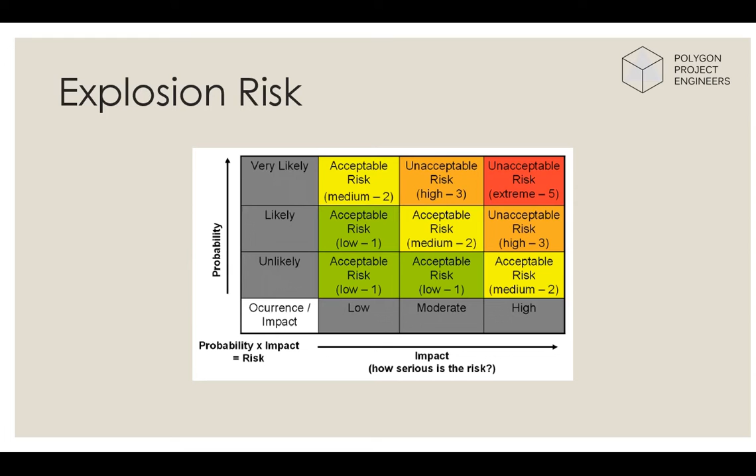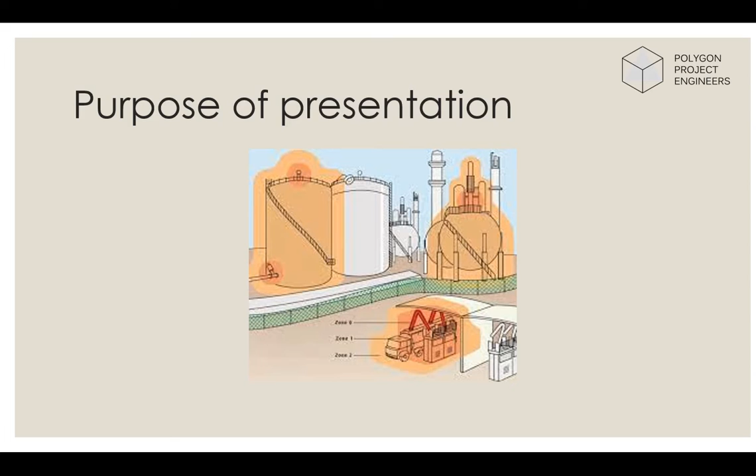This presentation seeks to arm those who dare venture into the subjective matter of hazardous location classification with the knowledge required to make decisions regarding the dark art of zonal classification in all its vague and unconcise glory. The information in this presentation is set out in a step-by-step format to allow easy navigation of its contents and provides an instructive checklist on the method of allocating hazardous zones. Please keep in mind that the contents of this presentation is applicable to flammable dust and vapor only.

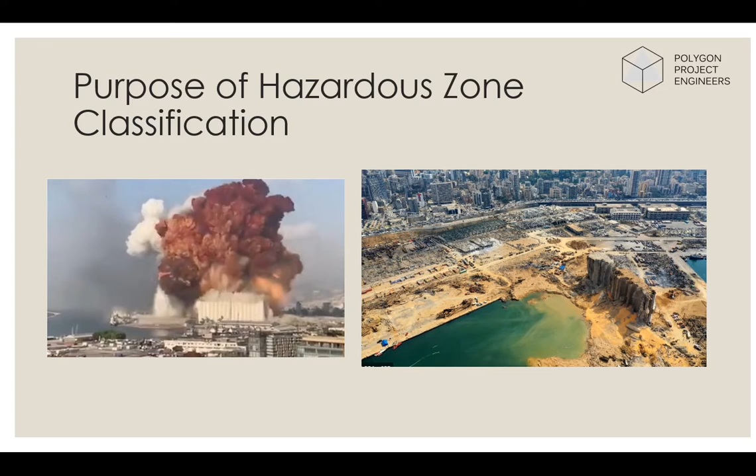The risk of explosion and fire damage is a severe one. Defining conditions which tend to cause the presence of an explosive atmosphere allows for the selection of safe apparatus within the defined areas. The classification of these zones is necessary to understand the areas that are most likely to cause an explosion or fire hazard due to the frequency of an explosive gas or dust atmosphere. The hazardous zone will also inform the apparatus that can be used within them. The existence of an explosive atmosphere can be attributed to the presence of suspended combustible dust or combustible vapors.

The primary specifications concerning the aforementioned topics are the BS EN IEC and SANS 60079-10-1 and 10-2 and their derivative SANS 10108. It's clear to see that the fear of simplification of the standard, given its subjectivity, hinders international communities from assimilating the standard, and they choose to adopt it instead. The adoption of the former two standards is a testament to the inability of the SANS 10108 to perfectly or even adequately portray the requirements of hazardous zoning.

Intrigue and ambiguity in standards are generally seen as the weapons of the engineer. However, the so-called loopholes in this particular South African standard feel more like bullet holes, and the engineer is forced to fill in these information gaps with international standards, analogical reasoning, and critical thinking.

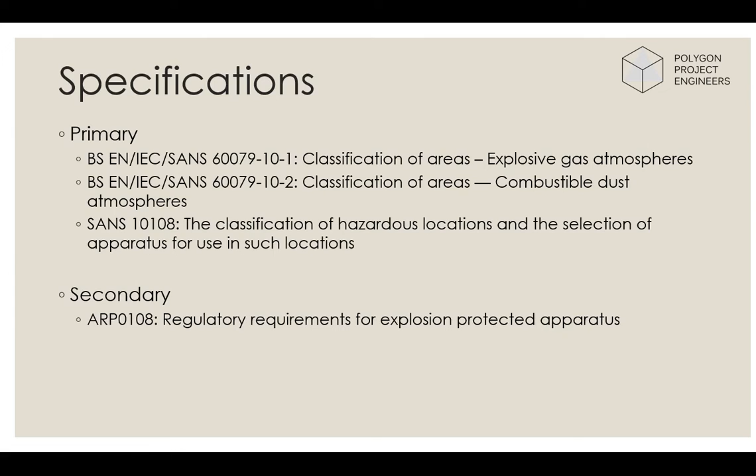The first step in the process of determining hazardous classification zones is to determine the relevant materials handled on site. Materials are grouped into two main subcategories, that is, flammable liquids that give rise to flammable vapors and flammable solids that give rise to flammable dust. Flammable vapors and dust are the only two substances that can give rise to an explosive atmosphere.

Flammable liquids are classified by group and flammable dusts are classified by class. The class definitions are defined in the SANS 10108 explicitly, but the groups are not clearly defined and are based on other standards. The groups do, however, play a role in apparatus selection. It is critical to note that the classification in terms of hazardous zoning is separate from the classification based on closed cup flashpoint that we are familiar with. Classification of specific materials is found in SANS 10108.

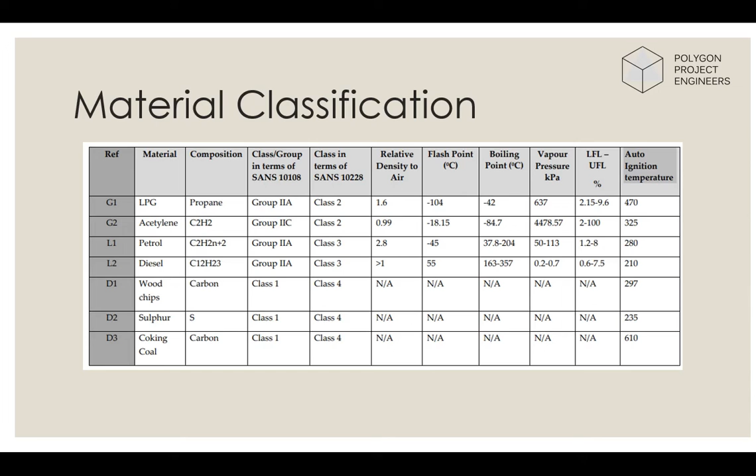Useful reference information for the classification of flammable vapors may be composition, flashpoint, boiling point, vapor pressure, upper and lower flammable limit, and auto-ignition temperature. An important factor to consider is relative density to air to determine rise or sink. Note that the density of vapor is different from the density of the liquid.

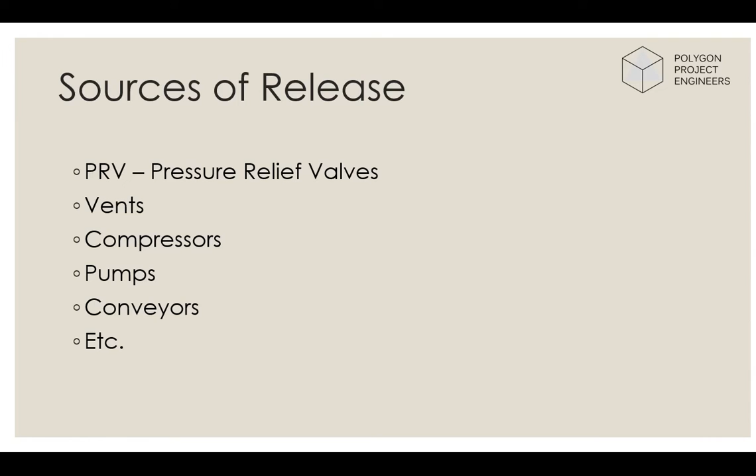Sources of release of flammable materials and substances which could lead to an explosive atmosphere should be established. These sources of release could be continuous, primary, or secondary, and are usually indicative of the zone. However, the subjective definition of each zone as shown in the next slide should be the sole manner in which zones should be classified. The rate of release and forms of release is also critical to understanding the limits of the hazardous zone. Extensive information on sources of release and their implications can be found in the international standards.

The application of hazardous zoning is only as good as its definitions. Given the subjective nature of the topic, the zones are defined as Zone 0, Zone 1, Zone 2, Zone 20, 21, and 22. The first three zones are for explosive gas atmosphere, and the last three zones are for dust atmospheres. It's dependent on frequency and for the length of period that it can create an explosive atmosphere.

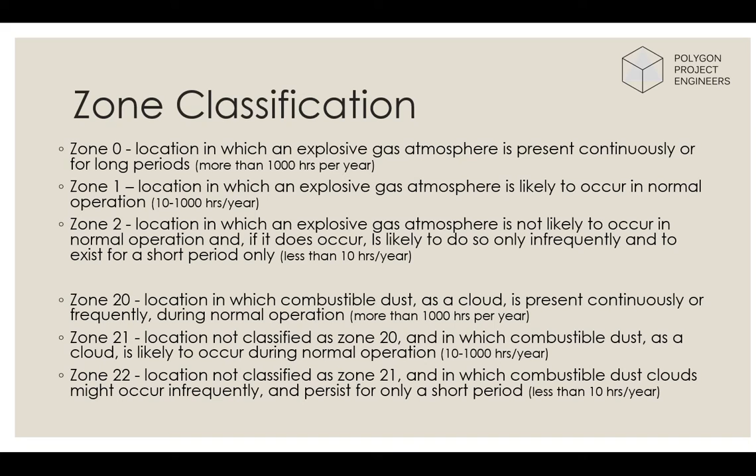The cowardice of the authors of the SANS 10108 standard is evident from their fear of clearly stating geometries, limits, and distances, or even providing a method of determining these distances. The SANS 10108 uses the international standards as a crutch in this regard to prevent the explicit demarcation of hazardous zones. The international standards provide an excellent resource on the suggested geometries of flammable vapors under varying conditions. The zone geometries of dust areas are specific to conditions, applications, and processes.

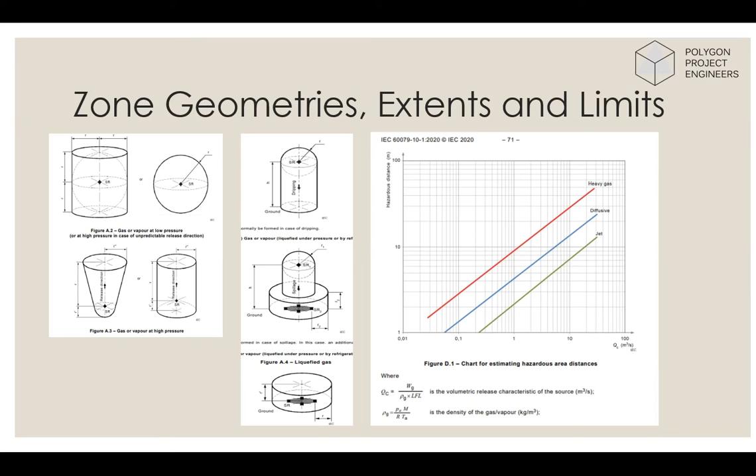The intended method of determining the extent of hazardous zones is to first identify the volumetric release rate of the potential leak and using a graph to determine the hazardous distance depending on the characteristic release. The release could be heavy gas, which is heavier than air and falls down, diffusive, which is lighter than air and floats up, or jet, which is forced expulsion.

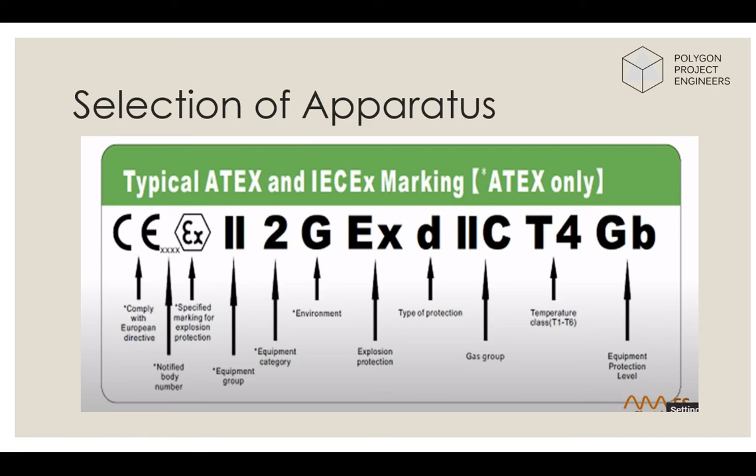Selection of apparatus is generally the next stage after the determination of hazardous zones. The input information of hazardous zoning and apparatus requirements is used to generate a safe layout for machinery positioning. The complication of the method of selection of safe apparatus is that there are too many authorities. SANS 10108 contains a table detailing the equipment rating required for each zone and material group. The above slide shows typical European safety markings for safe equipment.

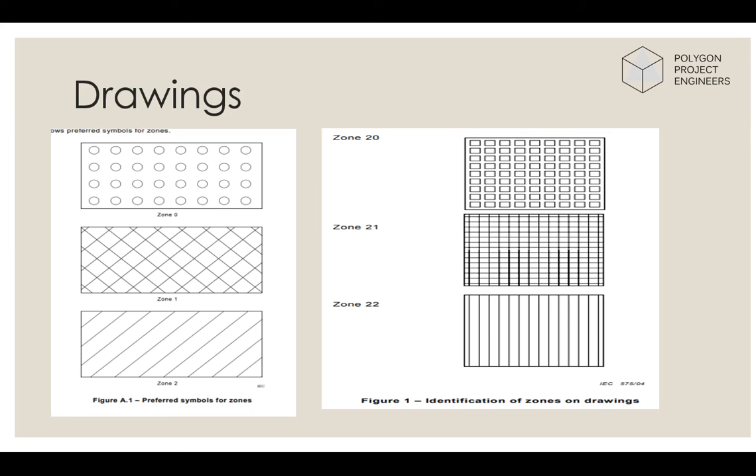It is critical to note that the geometries of hazardous zones are indicative of real-world positions and as such are three-dimensional. The drawing layout indicates the spatial dimensions while the zone classification accounts for the temporal dimension. The zones each have their own preferred hatch patterns from the international standards as shown above.

The process of determining hazardous zones is simple. First is the identification and classification of hazardous materials. Possible sources of release need to be identified and classified by zone. The geometry and extents of the zone can then be determined and the required apparatus can be selected in accordance with the zone and material classification.

While noting the vagueness of the standards and the massive space it gives for the engineer to make decisions, it must still be noted that the onus falls on the engineer or preferably multidisciplinary team to make the best decisions and back it up with reasoning, as the risk of explosion is always there and negligence or incompetence can lead to disastrous results. Thank you.